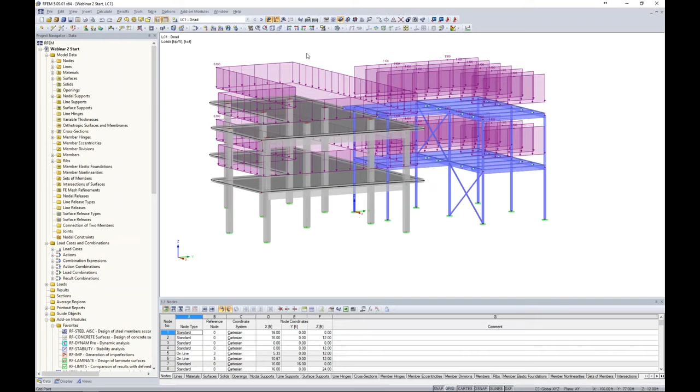Previously we loaded the structure, and we ran our load combinations and got a full analysis. Now that isn't always the case. Sometimes we go to run an analysis after we have loaded our structure. For example, we have loaded our structure with dead load here. Now previously everything ran great, but as we know with any finite element software that we're using, that doesn't always happen. So when we go to run this first load case here, as we know from RFEM Webinar 1, this is running according to a linear analysis, we immediately get an instability.

Instabilities are nothing new despite what program you're using, but I want to show you these features that make our lives a little bit easier within RFEM. The first thing to know is the text about the specific instability. It says this model is unstable. The instability is found at FE node number 64, direction Z. So it immediately gives me a location and tells me that there's some type of issue in the global vertical direction.

The model is statically underdetermined. So when I close out of this error message, you'll see that my big red arrows show me exactly where FE node number 64 occurs. Now, I'm not going to say that 100% of the time this big red arrow is going to point out our issue.

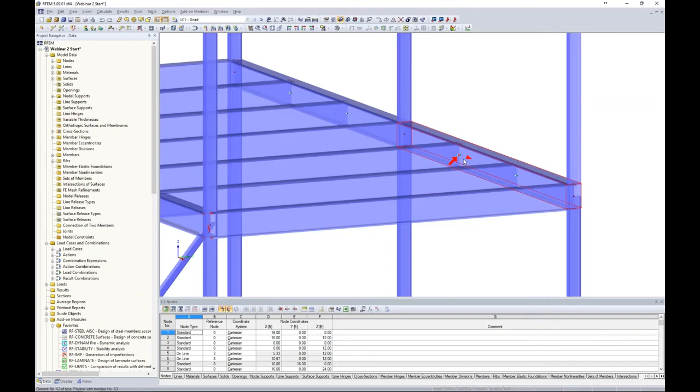But a lot of the times this really is where the issue is occurring. So when I scroll in here, I really don't see anything immediately. When I turn it to a wireframe model, okay, well, I can zoom in here and see that I forgot to connect my node here of my beam to my transverse beam. Well, that's no problem at all. I can just easily drag and drop that to connect those two members.

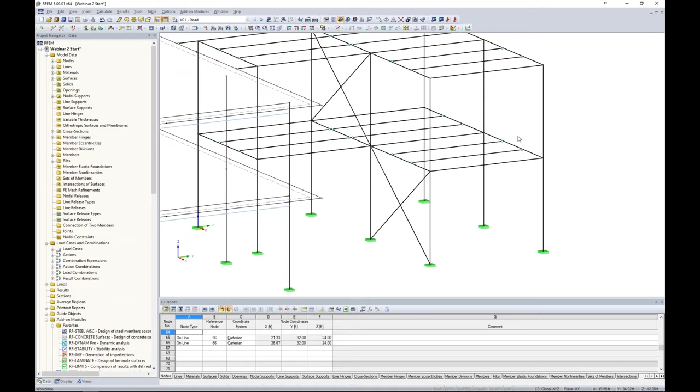So you can imagine that when we have a huge model with a lot of members and we get this error message for an instability, that red arrow is a huge benefit to really narrow down on where that issue is occurring, rather than it being like hunting for a needle in a haystack, trying to determine maybe if a node isn't connected someplace.

So now we can go and run our load combination again, or this is our particular load case. We run it. Everything appears to run okay this time. We immediately get our deflections here, which we can decrease the deformation factor. So that's great, but now we need to run our first load combination, 1.4 dead load.

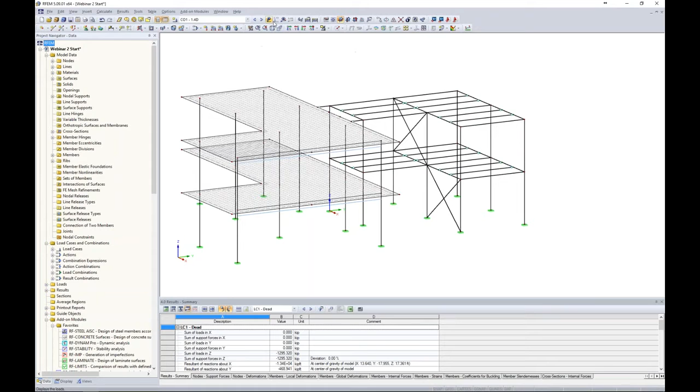So this is just a load combination from the ASCE 7. I take a look at my applied loads. It's applying that 1.4 factor to all of my dead loads, our surface loads and line loads here. And maybe turning this back into the rendered view, I begin my first load combination analysis.

And lo and behold, we get another error message. So it's another instability, but this time our text is a little bit different. It says our model is unstable and the instability is found at this location, direction X. So we have a little bit of a different direction that it's being affected now.

But this says a specified load is greater than the critical load. So this tells me that at this particular location I probably have some type of issue with buckling, because the specified load is greater than the critical load.

Well, I can close out of this error message and zoom into this big red arrow here. Maybe I turn this into wireframe. I see that everything is connecting fine. So I don't really understand where this error message could be coming from.

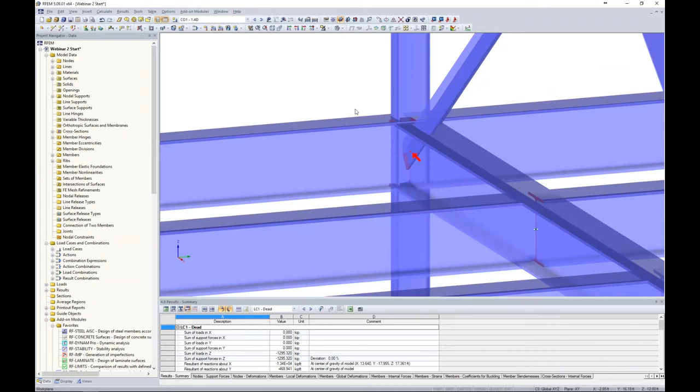Well, this is where we can utilize our add-on module RF Stability. So from our long list of add-on modules over here on the left in our project navigator, we can launch RF Stability. As you can see, this is just a simple dialog box that pops up within the program, and it allows us to do an eigenvalue analysis for a few different eigenvalues based on the buckling behavior of our structure. And what we can do is import different axial forces from either load cases or combinations.

Now, because I was able to solve for my first load case, dead load, just fine, it makes sense to import in those axial loads to see how the structure is behaving based on those applied axial forces. Now, we have quite a few other settings here that I won't get into in too much detail, but we do have an option down here that I can calculate an eigenvector for an unstable model. So this is if I couldn't get the model to solve at all, so that the causes of the instability can be checked graphically. So this is a feature too if we couldn't even get our dead load to solve.

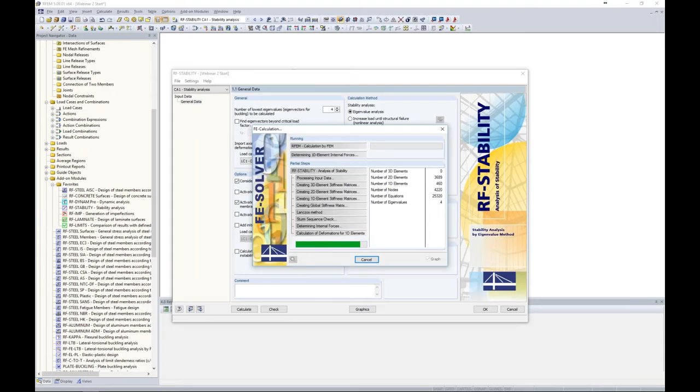Now for this, I will run the calculation and it quickly runs the different 4 eigenvalues. And I'll now see my results available in my tables here. So you'll see I'll have 2 different columns. The first is the critical load factor.

Now the critical load factor is just a factor that I can multiply that applied dead load by before I'm going to see the associated buckling behavior. We have 4 different eigenvalues, so the critical load factors are listed here in ascending order. So probably our most important one would be this first eigenvalue. Now the magnification factor is just a relationship between the moments of a linear static analysis and a second order analysis. So essentially my first order moment times my magnification factor is going to give me my second order moment. But now we're a little bit more concerned with this critical load factor.

So if I take a look at my graphics, we're still in this add-on module RF Stability. We can see with our drop-down box here I have four different eigenvectors. Looking at the first eigenvector, we can see the buckling behavior of this structure.

Remember, I can only multiply my dead loads by 1.03 before seeing this type of behavior. If I take a look at the other eigenvectors, same type of behavior. It all has to do with these slender columns here. So when I multiply my dead load by 1.03, I see this buckling behavior, and when I try to run 1.4 times my dead load, that's where our instability is coming from. These members simply can't handle the applied loads.

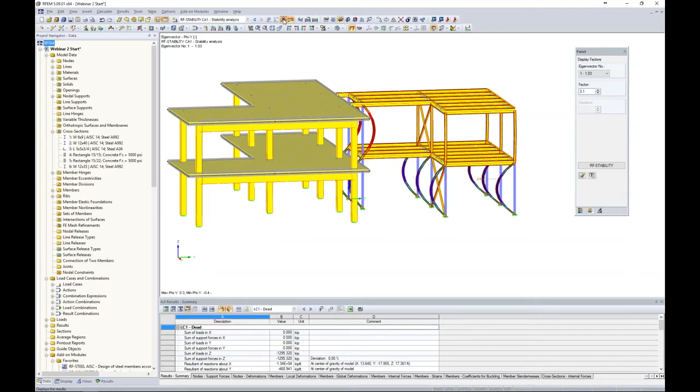So back under my Data tab, at the very top is all of my input data. I can take a look at my cross sections, for example, and maybe turn off my results from RF Stability. I click on my first cross section defined - it's a W6x9, a very small number. So perhaps I want to increase that to something a little bit larger.

I can just right click and edit all of these cross sections at once because they're assigned to a single cross section within the program. Open up my cross-section database, here are all of my AISC shapes. We would like to choose something more like a W10x49, much bigger than a 6x9. Still an A992 steel is okay, but we're going to have a bigger cross-section here. So I click OK, and it's asking me to clear my results.

So now when we go to run our 1.4 dead load, run the analysis, everything should run fine because now we have a sturdier member there and we don't see that same buckling behavior. So you can see how RF Stability is extremely useful, not just if you have an instability, but if you want to see the different buckling modes of your structure. I did a few other webinars where I utilized RF Stability to export as imperfections as well.

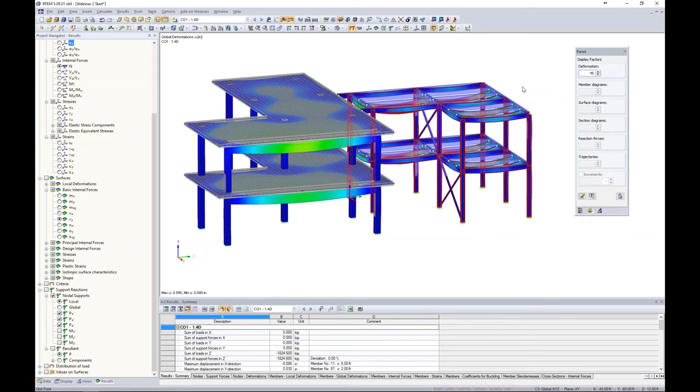Okay, so now that we've addressed instabilities, I'd like to move on to singularities. The first thing to do is turn off our results, and let's take a look at our top surface here of our concrete structure.

If I drag my selection toolbar over that top surface, I can use my drop-down box to create a visibility by selected objects. You can always right-click and show the hidden objects in the background if you'd like, or right-click and turn that off so we get a clean view of only the structure we've selected.

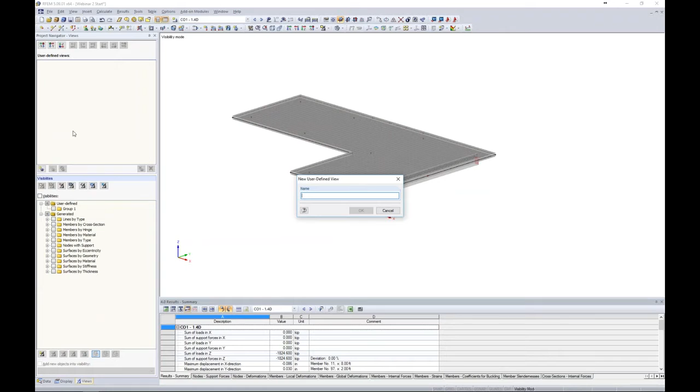Under Views, I can create a new visibility, and we'll call this Top Slab. I click OK, so now I have this user-defined view under Views that I can always refer to despite whatever view I'm currently in. This is the case when we go to show the hidden objects in the background and show a wireframe view - members are always 1D elements in a finite element software, while our surfaces are 2D elements.

But the problem is that where we intersect this column to the 2D surface, you can see the intersection occurs at this teeny tiny FE mesh element, the single node point. So we can imagine all of our force transfer is occurring at this single point. Inevitably we're going to get very high stresses, very high forces. If we go to do design of this concrete slab, we're going to get high reinforcement simply because it's a product of the high internal forces at this location.

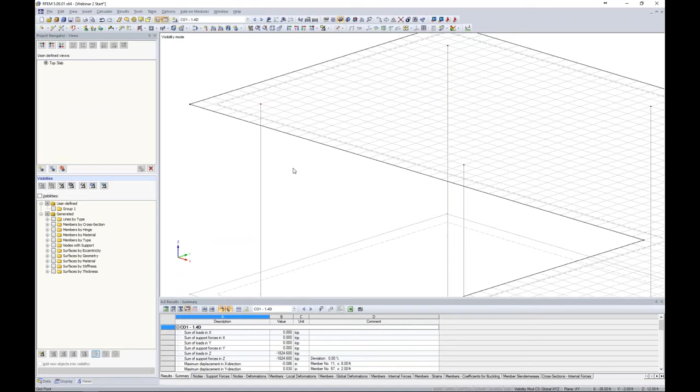Now in reality, when we render this, these columns are 15 inches by 15 inches, so we are going to get some load distribution. And like I said, this is not just for our program RFEM - this is common in any finite element software. So what tools do we have available in RFEM to help us address this so we're not overly designing our structure?

The first thing I'm going to do is jump to a different model here that I have saved, where I've gone ahead and used our add-on module RF Concrete Surfaces to do my reinforcement design. Now I have an entire hour-long webinar dedicated to just surface design using this add-on module, so we won't get into it today. But if you're interested in how we can do reinforcement design for this, refer to that YouTube video.

So once we run our analysis in RF-CONCRETE Surfaces to get design per the ACI, we have our different required reinforcement. The first is AS1 in the top direction. Now, judging by this red arrow, we can see the reinforcement direction, and you'll notice that where these columns are framing into the slab, we have high reinforcement given there. The same goes for AS2 in the other direction.

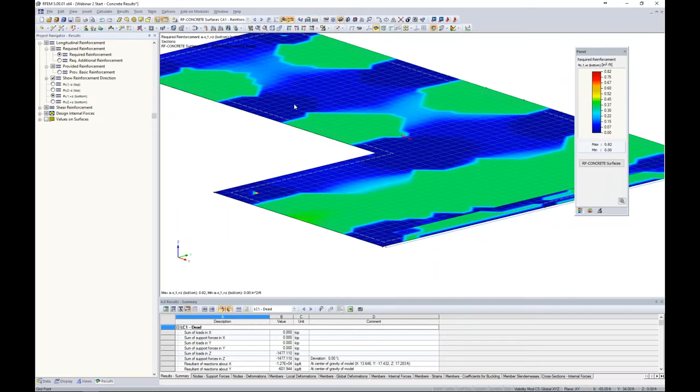Now, when we're looking at AS1 at the bottom, it's not the same, which makes sense. We have a lot of bending at the bottom of our slab between our columns, so that's where most of our bottom reinforcement is going to be. Same with AS2 at the bottom in the other direction.

Now, focusing on AS1 top and for our slab with this particular reinforcement design, this is nice in terms of our contours, but perhaps we'd like to see this in a more numerical value. Well, we can do so with sections, and what we will do with our first section is up here in our dropdown, we can create a new section numerically.

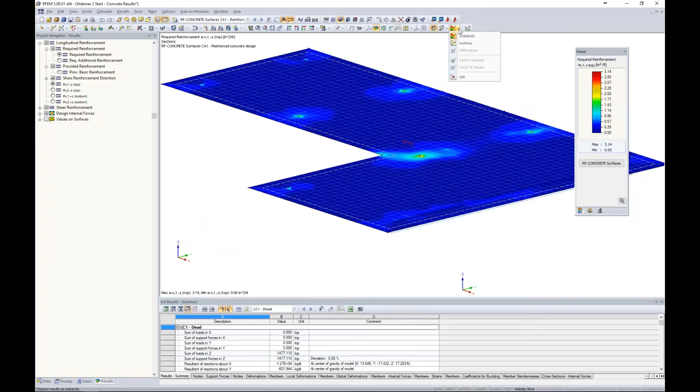But before I do that, right next to it, we have the option to completely turn off our ISO lines. So these results will still be available, but I'm just simply turning off those ISO lines for the sake of making my section cut right down through the center of my slab. So a section is exactly what you would think of it. It's going to give me the internal forces or my results at that particular location. So we can create this section numerically.

Now, the first thing I need to do is to give it a section name, section 1. It will be a section cut through my surface, and I can apply this to my single surface number 2 here by clicking on that graphically. The next thing to define is my start and end points for the section.

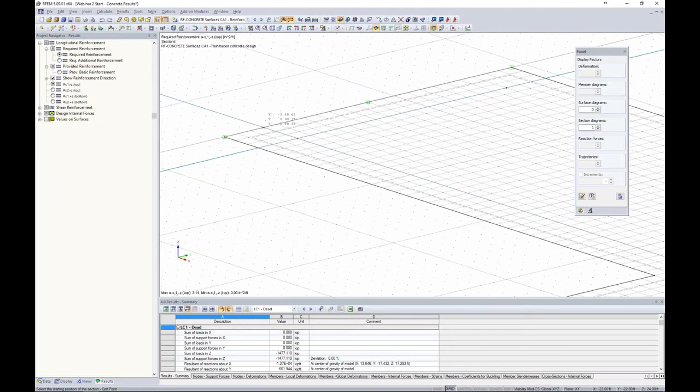So what I like to do is maybe turn on my drawing grid down here, and I can activate that down at the bottom, change my origin for my drawing grid, and I can choose my 2 points here by zooming in, and I want it right down that column line. So my second point will just be located at the second end of my slab, and because of those AutoCAD-like features, the program does a great job of just snapping to those points that I most likely would want to place my section.

Now, the section on surface, the projection direction, we can have it in the global X, Y, or Z orientation, or we can define our own vector if we want it at some type of angle.

Once I click OK, then it immediately brings me into the results diagram for my section, and you'll see our exact same results that we were viewing in RFEM, and in particular, we take a look at our reinforcement design per RF-CONCRETE Surfaces. Here are those spikes in reinforcement where our columns are framing into our surface. I think we can easily say that this is being over-designed for those internal forces.

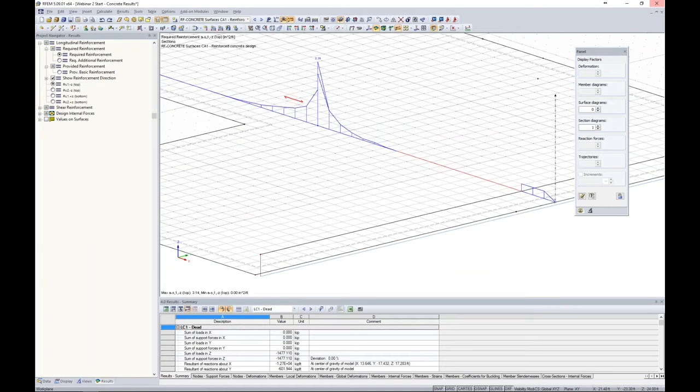Now, I can always exit out of here and view these surfaces, as you can see graphically on my surface as well. So going back to the results diagram by right-clicking, I want to show you guys a useful feature called smoothing ranges. So up at the top is the option to edit our smoothing ranges.

Now, my first column occurs 3 feet from the edge of the slab. My second column occurs at 20 feet from the edge of the slab, and my third at 41 feet. So what I'd like to do is smooth out the range 1 foot on either side of the column for a 2-foot range there. So this is to account for the load distribution that's occurring when in reality the program's not accounting for that.

So what we can do is define our different ranges. So for example, for our first column, the beginning will be 2 feet and the end will be 4 feet. The program automatically calculates the length as a total of 2 feet for that first smoothing range. The second will be from 19 feet to 21 feet. And lastly, for our third column, it will be from 40 to 42 feet.

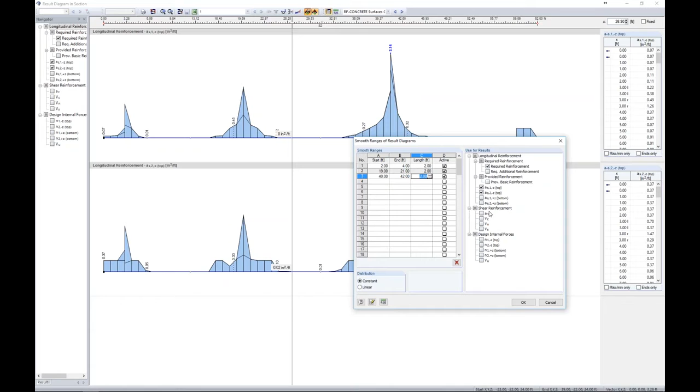The program automatically assumes that we'd like to apply these smoothing ranges to what we're currently looking at, but we can always activate and deactivate different results available here. So now when I click OK, you can see the smoothing range applied.

For example, column number 3, we went from 3.14 inches squared per foot to 1.65 inches squared per foot. So extremely useful in the sense that we can print this to our printout report. We can even use this drop-down box here and pull up one of our other load combinations.

And for example, I'm going to clear out all of these result diagrams and just activate my MX and MY. Again, we're seeing those spikes in internal forces here. I can go back to my smoothing ranges and simply activate the checkbox for MX and MY for all 3 of these ranges. So now when I click OK, you're going to see the smoothing range applied here as well.

Now, one thing to note, if we jump back to RF concrete surfaces, for example, the smoothing ranges are shown here, but if I were to exit out, they are not shown graphically here within the model. So the question is, well, that's great, but how can we apply this so that the program actually designs for those average forces rather than us just kind of putting a fictitious number after our results are shown in the smoothing ranges?

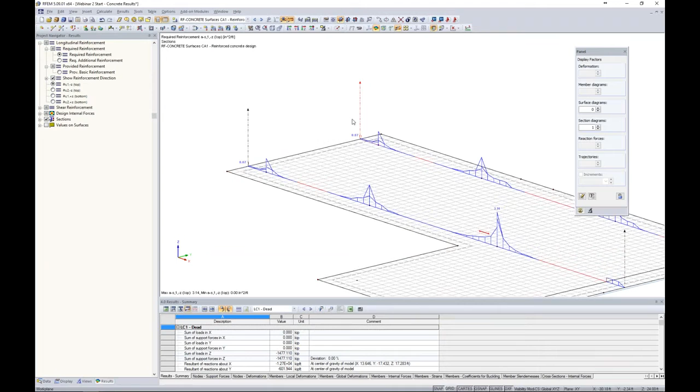And one thing I forgot to mention here, if we take this section cut and we highlight it, we hold down our control key, maybe we want to copy it down this other column line just to give us some perspective on some high design forces as well at this location. So smoothing ranges are great, but if we go back to our data tab, we will see these sections available here. We have section 1 that we just created, and then here's our second copied section.

There's another feature called average regions. So if I right click, I can create a new average region. Now for this, we want to apply it to a particular surface. So I graphically select surface number 2 here.

And you'll notice that I have 3 different forms that I can select for my average region: a rectangle, a circle, or an ellipse. So for our particular case, our columns are rectangular in shape. So it's probably most beneficial to use a rectangular averaging region. But maybe you have a circular column framing into this slab. So that can be utilized as well.

The next thing we want to do is to define where we want to apply the center of the averaging region. Well, we'll apply it to our first column here. The dimensions, if we want to average it out over a 2-foot section again, for both our A and B dimensions shown in this picture, we can.

Now, you have a lot of control on what internal forces you exactly want to average. So the program assumes that for the local axes of our average region, U and V, we want to correlate those with the X and Y local axes of our surface. But in reality, we can activate all 4 of these if we just want to average out everything together, independent of what our local axes are doing.

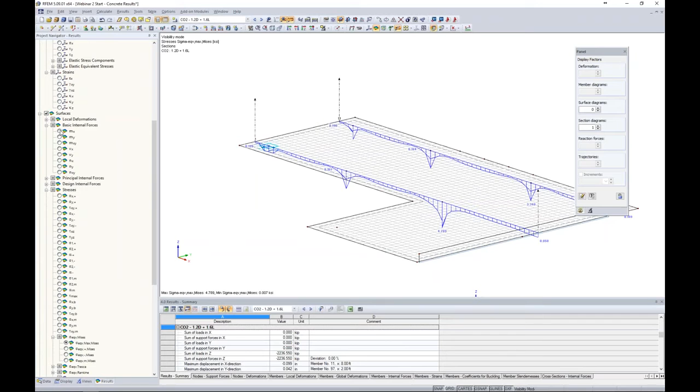Now, to make this very clear what we're doing, I'm going to jump to one of these particular load combinations, and under my results, I'm going to activate my sections. So we're still viewing our sections here, but for my MX forces. So this isn't my concrete design now, this is my internal forces MX.

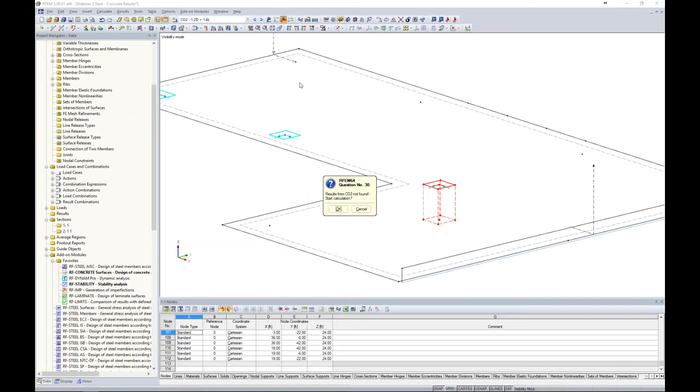Now with this average region, all I have to do is to select it, hold down my control key, and then I can take it, drag it, and drop it. It's asking me to clear my results, that's fine, and drag and drop it to some other regions here. Now I can rerun that same load combination rather quickly here, and we will see that average region now apply. Now previously this was something like 83 kips per foot, so you can understand that this is now going to give us less internal forces.

Now if we jump back to RF-Concrete Surfaces, and it looks like we lost our results here, so I'm just going to quickly rerun that. And all this is doing is I went ahead and applied the ultimate limit state designs for all of my load combinations to do my reinforcement design. But what I want to show you with these average regions is that my As,1,top is still showing 3.16 inches squared per foot. So this average region did absolutely nothing to help us with that.

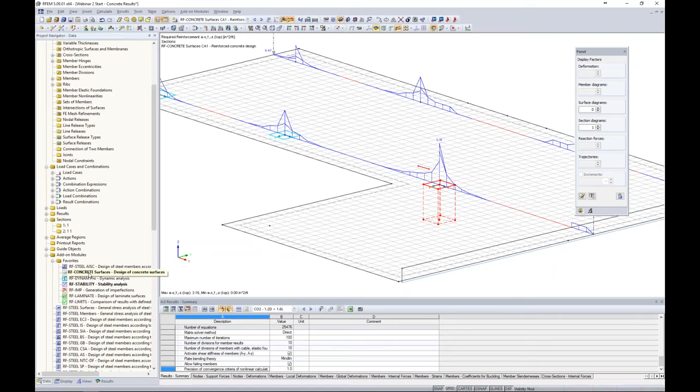So why is that? Well, back under the Data tab, under the Concrete Surfaces add-on module. So again, if you want a more detailed look into this particular add-on module, refer to our previously recorded webinar. But to let you know, when you are using average regions for concrete design, under the Details tab, it is default to have this option checked off. But what we'd like to do is to apply the average internal forces for our ultimate and serviceability limit state designs. So now we want to check this checkbox. I click OK, I click OK.

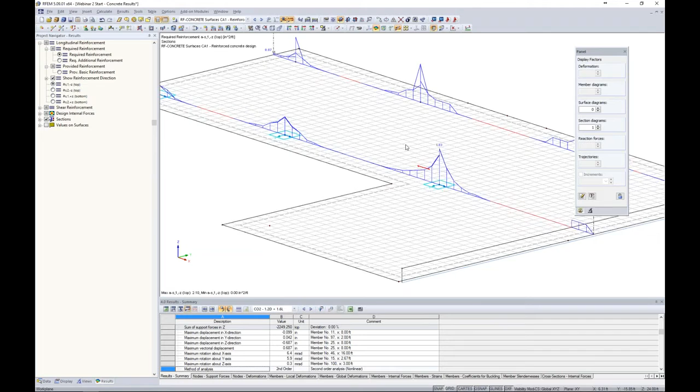We've lost our results again, but we can easily run a quick analysis, which you can see solves rather quickly, because now it's taking those average internal forces to give us our reinforcement design. So now we have gone from 3.14 to 1.83. So this is how we can apply those average regions to address singularities within the program, especially for something like concrete design. Okay, so that is what I wanted to look at in terms of singularities.

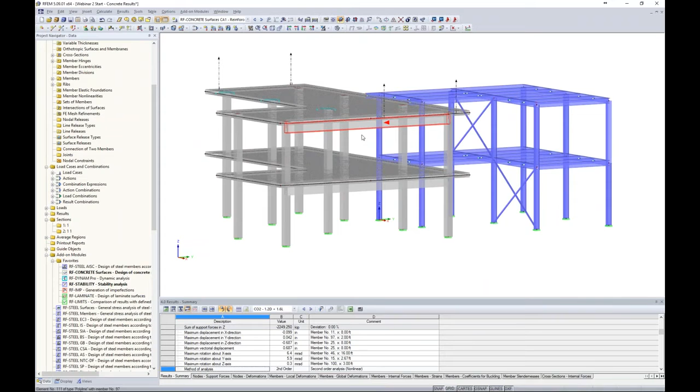Now, switching topics, I'm going to cancel my visibility mode here, render my model. And in RFEM Webinar 1, if you can remember, if you were present, we created this beam member here, and it's actually a rib because we wanted to span from this column to this column, but we didn't have an intermediate column, so we thought it'd be best to apply a rib member there. Now, if I were to double click on this rib member, you can see that the member type is actually set to that. And previously we had defined effective widths for this rib member to take that into account for analysis, but also designed for our reinforcement per the ACI.

Now, let's say we have a situation that we actually have a precast element, and the precast slab is sitting on this precast beam, and it's not a monolithic pour like what we'd see with a rib type member, but in reality, I want to fully release the moment. Maybe I still have resistance for my lateral movement and of course my vertical movement, so X, Y, and Z is fixed, but no moment will be transferred between the two. So what I'd like to do is to not have this set as a rib, but we'll set this to a beam member. Now when I click OK, it's asking me to clear my results.

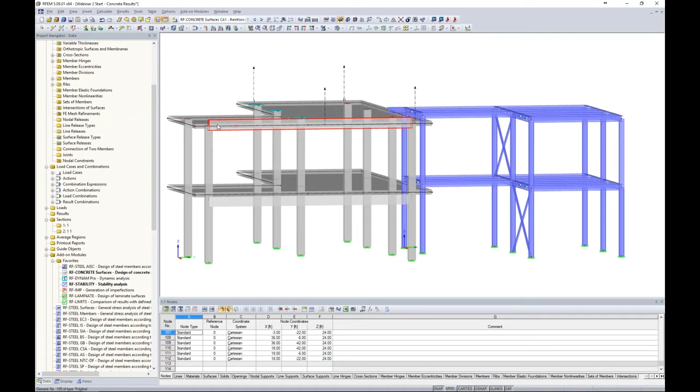I take a look. Well, my typical member is modeled directly at the same center line as the slab. But in reality, what I'd like to do is to still drop this beam down below the surface. So how can I apply an eccentricity? Well, if I double click this member, we have a tab here called Options, and that's where you'll see member eccentricity. Now we need to define a new member eccentricity. And you'll see here that we have not only the local axis system X, Y, and Z for a member, we can also set it according to the global X, Y, and Z. The local might come in handy because if we are modeling a member at an angle, then obviously we want to apply the eccentricity according to the local axes rather than the global.

Now we also can apply this movement of the beam in the X, Y, and Z, so not necessarily just vertical eccentricities, but left and right too. So typically with this situation, I would need to understand, well, what's half the depth of my slab, what's half the depth of my beam, add those together, and I can manually apply my eccentricity. But we have automatic features in the program that can do all of that for us. So you can see here that I have 6 different options of where I can select my beam to be, for the eccentricity to be applied to. This little red dot highlights exactly which option I've selected here.

So I'd like the top of my beam, and I want to offset it according to a surface. So then I can graphically select my surface number 2 here, and I want to offset it from the bottom of that slab. So now when I click OK through all these dialog boxes, we can see that that beam was dropped down below the bottom of the slab. Now this is the same concept as the rib member, but now we're not taking into account that effective width.

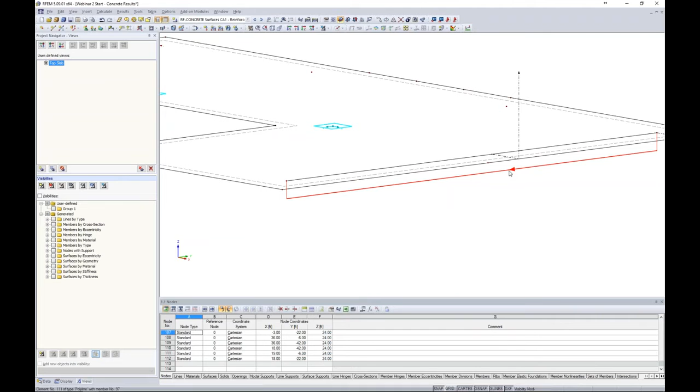So the question is that these little rigid links have full fixity to transfer moment, shear, and axial forces, but remember, we're trying to alleviate these moment forces being transferred from the slab to the beam, causing high torsion within the beam. So how can we automatically do this without modeling individually these little rigid links, what we may have to typically do?

Well, in the program, we have a feature under data, and if I scroll up to my input data up here, you'll see a line release. So what I can do is I can right-click to apply a new line release. The first thing the program asks me to do is to define the line, and I will apply the line that I used to create the member. If I try and click the member itself, it doesn't allow me to do that because that's in reality not where the member was modeled, but it was applied to this line integrated within the surface. Then we create a line release type.

So with a line release, we have the ability to apply releases in the translation directions X, Y, and Z. You can see that we also have partial fixities here, so maybe we don't have a full release or a full connection here, but we can apply that partial fixity spring constant, and we can get into things like nonlinearities. Nonlinearities might be very important for something like friction. If we choose one of the friction options in here, then we have some different settings based on friction coefficients that will allow us to emulate that same connection type.

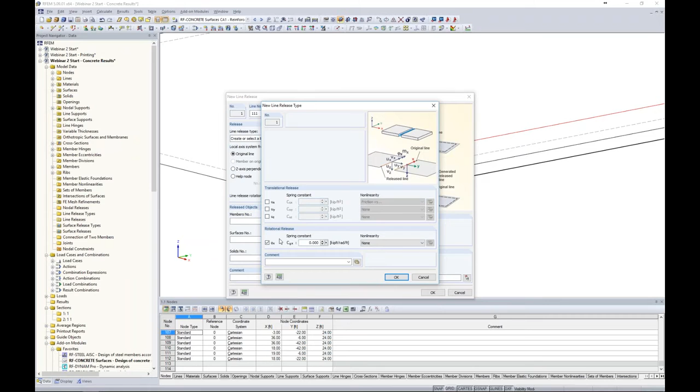Now, keep in mind that these are the local axes of the original line. So surfaces have their own local axes, our beam has its own local axes, and so do our lines. So we're not releasing any of the translation or rotation directions of the beams or surface, but rather the line itself. So we are going to completely release this rotational release, phi x here, and we can click OK.

We do need to define which is the released object. Well, we will apply this to our surface number 2 again, and we simply press OK, and we'll see the setting within the program that shows us that we have some type of line release here, judging by this blue symbol.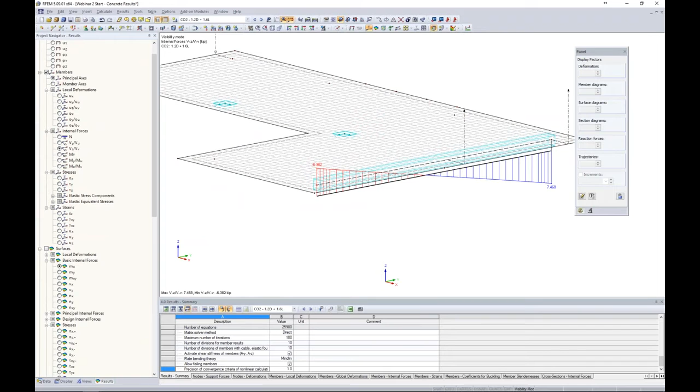So now if I were to run one of my applied load combinations, such as 1.2 dead, 1.6 live, we can run this load combination, and again, we're just viewing our initial view here, and I'm going to turn off my surfaces. And we just want to take a look at our member design. I'm going to turn off my sections. And rather, we're taking a look at our members and our internal forces for torsion. So you can see here that we still have a small amount of torsion along the member length of 1.933 kips per foot. But what would this look like had we not released that particular moment along the member length?

So this is how we can effectively apply line releases in the program if, for example, we did not want to connect our surface to our beam element. Okay, so changing topics once again, I want to move on to result beams. For this, I am going to cancel out my visibility mode here. Let's render our model. And moving on to result beams.

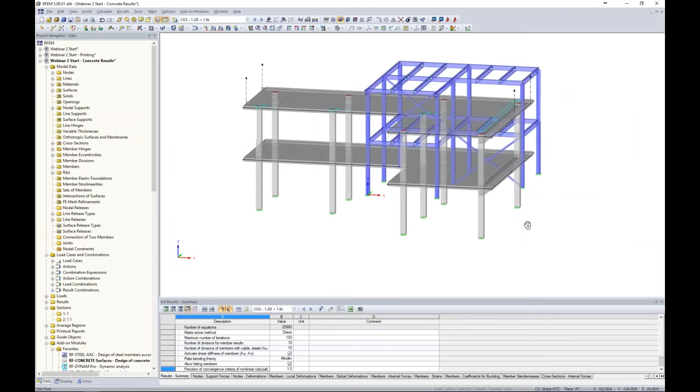So let's say that I'm interested in only my concrete structure here. I'm not so interested in my steel structure, and in particular, I want to know what the story shear forces are. And again, I don't want to incorporate the steel beams, but just the concrete surfaces and members. So how do I easily pull that information from the program? And this is where something like a result beam will come in handy.

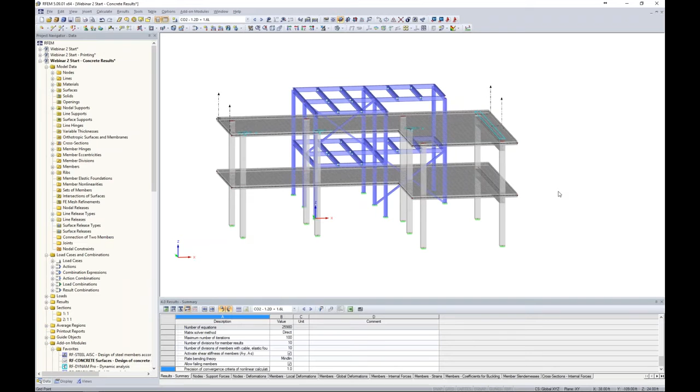So what I'm going to do is I'm first going to create a new user-defined view here, and using my drop-down box, visibility by selected objects. Now keep in mind that behind the scenes, when I show my hidden objects in the background, this steel section is still here. So under my views, I can create this new user-defined view. We'll call this one concrete structure only. I click OK.

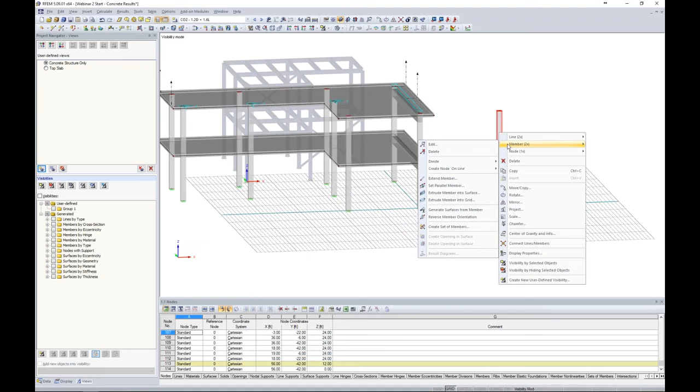And I'm going to turn back on my grid. I'm going to redefine the origin at the base of my structure. I'm going to hold down my control key to select these two members, and once again holding down my control key, I'm going to copy these, drag and drop them to a location parallel to the concrete structure. So what I'd like to do from here is to select these two members, right-click to edit them. And under the member type is where we can choose result beam.

Now, a result beam is simply going to take the information from other objects in the model and apply it so that we can view the analysis results as a member internal force. Now, result beams don't add to the stiffness of our structure. We're not applying them to an analysis. It's just simply a different way to view our results. So as far as a cross section, it doesn't matter if it's concrete, steel, aluminum, your own user-defined section, you can choose anything here. You'll also notice I don't even need to put a support at the base of this column section. What I need to do here is to define some additional information.

Now, as far as result beams, we have 4 different options. The first is within a cuboid quadratic. So this is going to use a quadratic integration area where the centroid of all of the elements that I'm trying to incorporate within this result beam needs to be located within the member's axis. And by member's axis, I mean the axes of our actual result beam shown here. So I'm not going to use this option today, but we will be using this second option as our second example today. So this is within a cuboid general. What this will do is it will apply a rectangular integration area where the centroid can vary according to the local axes of our member.

The third option we have is within a cylinder, so this will use a circular integration area where the centroid must be located at the member's axis. And again, this is clarified here with this nice picture that we have. The last option here is to choose from listed including objects. So here is where I'm going to start off with my first example of a result beam.

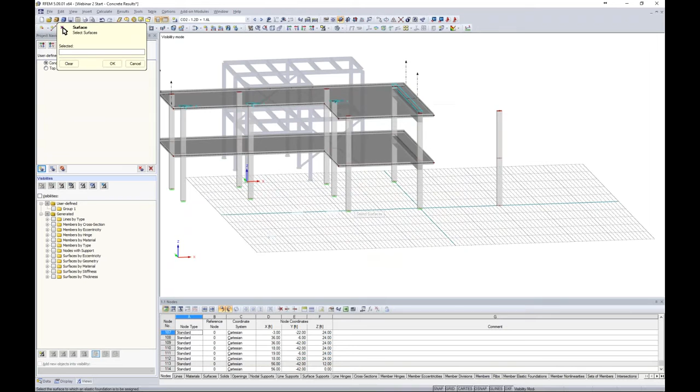And what I want to do is I want to select my surfaces that I'd like to apply to this result beam, so I can just highlight everything. Remember, my steel is in the background, but because it's not selected, I don't have to worry about selecting anything from there. As far as solids, we don't have any, so we can leave this either as all or none. And members, we want to graphically select all of our concrete members here. I click OK. We can even exclude any objects from our selection if we'd like to here. I click OK, I click OK.

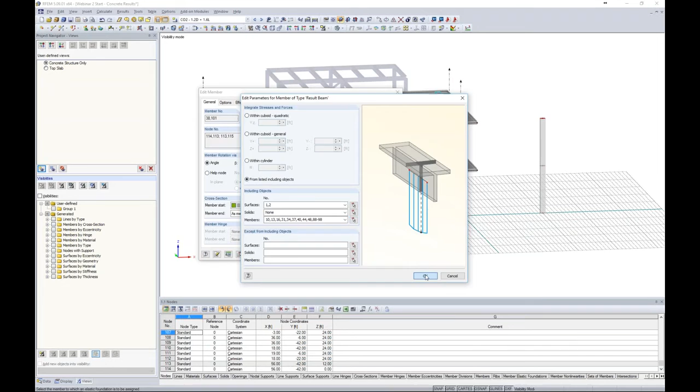Now I'm going to run one of our load combinations where I have a lateral load applied. So you can remember from webinar 1, we applied a wind load in the Y direction here with some gravity loads. So if I run this first load combination, then you will notice that after the result is complete, I have my member over here with some results as well. So what's exactly happening? Well, I want to view my results on my members like I would any other member within the model.

What this is doing is incorporating all of my objects here and applying it to my result beam. Just to summarize what's exactly going on.

As far as viewing my shear forces in the Y direction, this is the local Y direction, so I can always right click and turn on the local axes of my members to understand exactly which direction I'm looking at. The local Y gives us my story shear information. For example, the top story is going to be 10.46 kips for this particular load combination. My first story shear is 39 minus the 10, and finally I have my base shear given here at 48 kips.

If we take a look at our shear in the other direction, we hardly have any forces at all. That's just because we haven't applied any lateral loads to this.

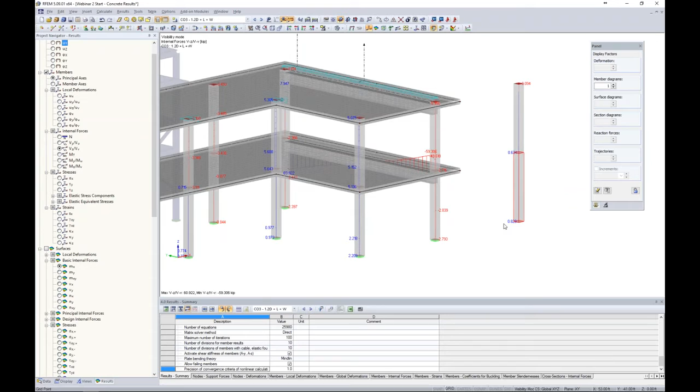Now lastly, we can even take a look at our axial load. So why would our axial loads be important? Well, if we're interested in the sum of our forces, I can see that for my concrete structure only, my sum of forces in the Z direction is 1,455 kips. Now this is different from my table down here shown in my results summary, which also gives you the sum of the loads in the Z direction, but this is for the entire structure, including the steel structure over here. So again, a result beam would be beneficial for only part of your structure here.

Now, the moments are not applicable in this case, and that is because we have moved the members of this result beam away from the centroid of the objects that we're interested in. So just keep that in mind when we're looking at something like moments, we can't get an accurate representation here. I'll show you in just a minute how we can do so.

But first, I want to quickly jump back to the PowerPoint here to explain what's going on. So as you saw with a result beam, we're integrating the results from a list of objects.

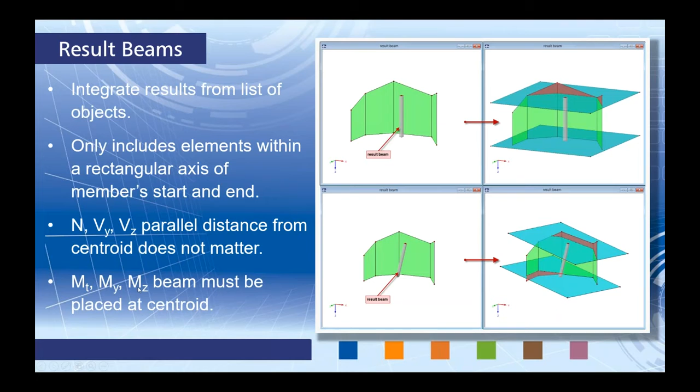Going back to the PowerPoint, now our moments, which I just mentioned, torsion, strong and weak axis bending, the beam must be placed at the centroid.

So let's move on to a quick second example with our result beams of how we can utilize this to view our moments. For example, if I'm interested in my top slab here, which we can go back to our user-defined views, and I really want to design a 4-foot wide section here on my slab, and I want to pull those internal forces from that 4-foot wide section.

Well, a section cut isn't going to work here because a section cut only gives me my internal forces at that exact location, exactly what it is, it's a cut. So in order to utilize a 4-foot section and pull those internal forces, we want to use a result beam. So what we can do is create a new beam member here, and instead of the member type beam, we will choose result beam.

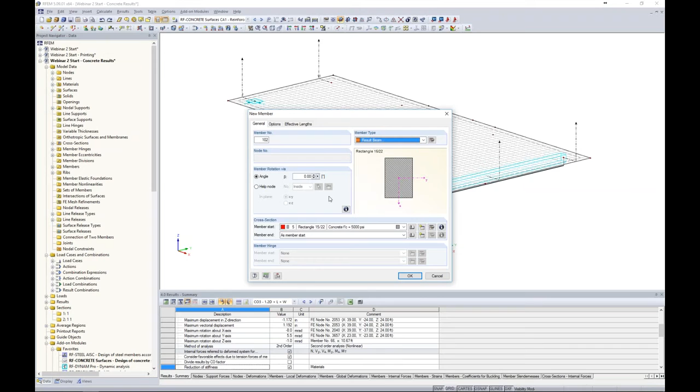And again, the cross section does not matter. We could choose anything that we like because we're not contributing to the stiffness of the structure in any way.

We want to move on to the details of this result beam, and this time I want to choose a cuboid. So if I'm interested in a 4-foot section, that means I want to choose 2 feet on either side of my result beam, laid out clearly in this picture. As far as the vertical direction, this isn't as important because I don't have any members modeled above or below, I'm only interested in this slab, so 1 foot is more than enough. But if I had any elements within this 2-foot vertical section, they would also be included in my results, so keep that in mind. This list is no longer relevant because I'm using only this section up here.

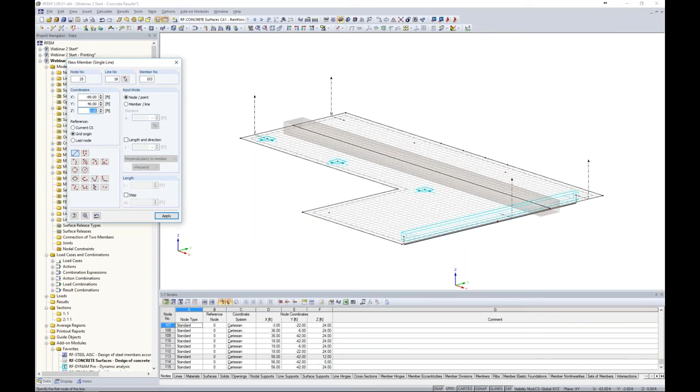So when I click OK, I can begin modeling my new member. I will snap to the midpoint of this line over here to make my result beam section right down the middle of this slab. You can see the program automatically snaps to the perpendicular section, just like in AutoCAD. And here is my result beam, so we can see that 4-foot wide section.

We can even render this for a clearer view of what's going on. So now let's take a look at our results, and I will run one of my load cases here - it doesn't matter, 1.2 dead, 1.6 live. I'm going to run the analysis.

And for our result beams, we can view them as we would any other member, as I mentioned before. So the first thing we want to do is take a look at our member internal forces, and perhaps we're interested in the moment. Let me turn this to wireframe view. Now our moments don't have a nice smooth diagram for my beam member here.

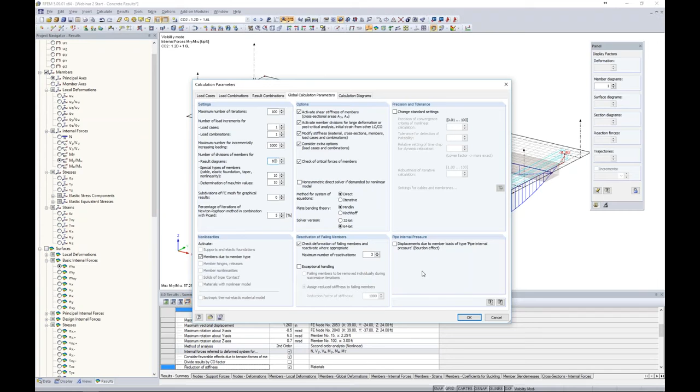So what's going on with this results diagram? It's pretty choppy. Well, when you're using a result beam like this, under Calculate, Calculation Parameters, we want to change the number of divisions of our members for result diagrams. The default is set to 10, let's actually change this to something like 100. I click OK, my results will inevitably be cleared. I quickly run this analysis again, and we'll see that our results look much better.

So that can impact the way that you're viewing your results. You want to make sure to increase those numbers of sections if you see any type of discontinuities like we saw with the beam before.

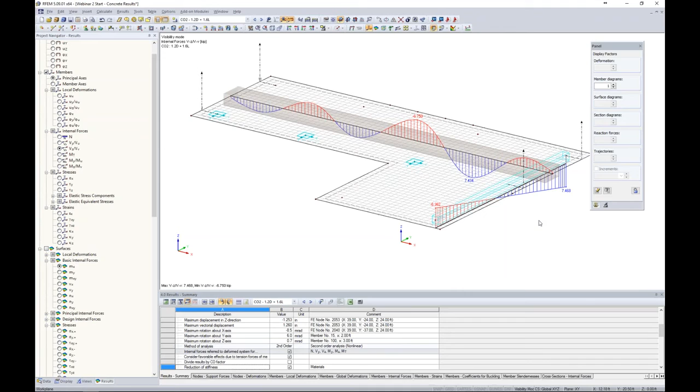So now we can see that our moment diagram is displayed quite nicely for our strong axis. Remember, these are the internal forces for our 4-foot wide section, that we can take and use for our own design. We can take a look at the weak axis bending here, and even axial and shear forces - these are all relevant within this particular section. But this is what I'm saying when you want to take a look at the internal forces of our moments, the centroid of our elements that we're interested in must be at the same location as our result beam's axes. So just something to keep in mind there.

Okay, so now that we have seen a little bit more about result beams and focused heavily on our concrete structure, let us cancel this visibility mode to take a look at our entire structure. And I'm going to render it.

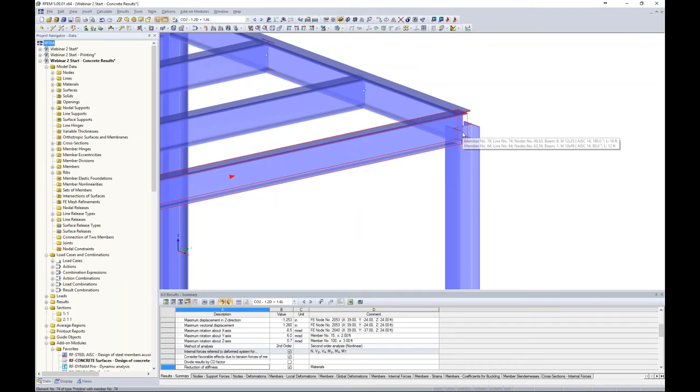Maybe I'm interested in the steel structure, and in particular I zoom in here to take a look at this connection. Now, this connection is pretty straightforward, we have members framing in at 90 degrees. But if we didn't, let's say we had tapered members, or members framing in at a weird angle, well this might flag us to think, okay, perhaps we'd like to do a finite element stress analysis for this connection.

But if I turn this into a wireframe view, I cannot do a stress analysis of this connection because all of my members are 1D elements. So we can get stresses along the member length and the member as a whole, but not for this connection. So what would we like to do about it? Well, the first thing to note is that this member, judging by this big red arrow shown here, the member end is framing into this node.

The same with this member, but this third member, the member start is framing at that node. So what I can do is right-click to reverse the member orientation. Now all three of my members will be framing in at this single node.

I'm going to select them all, right-click, and choose to divide the member by a certain distance. Because I switched around the member orientation, the member ends are all located at this particular node, so 3 feet from the member end is where I'm going to divide it. I've done nothing more than just create smaller members out of my initial member length.

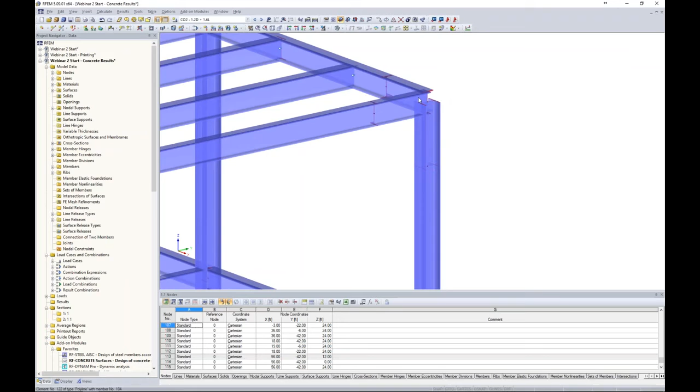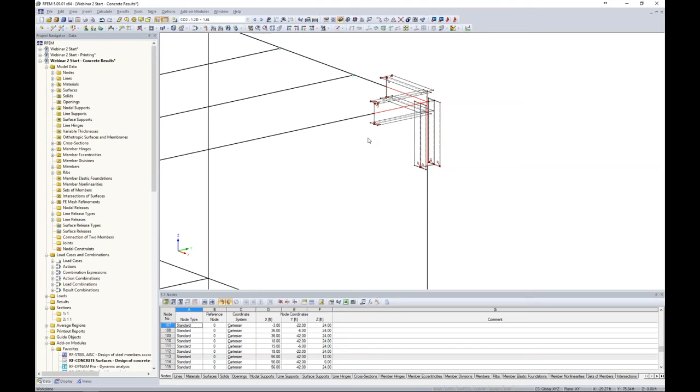If I render this, sure, we get this rendered view of our W section, but turning it back into wireframe view, I'll highlight all three of these members, right-click, and under member choose the option to generate surfaces from members. So now we've taken these 1D member elements and turned them into 2D surface elements, which will allow us to do a stress analysis on this particular connection.

Now, the first thing I want to do is under my display, turn off my FE mesh refinements. I'll get into this later.

I wanted to mention that this W shape was previously a W12 by 35. This new W shape generated by the surfaces has all those exact properties. For example, the web surface here has a thickness of 0.31, taken from the W shape. All of my dimensions, materials, and thicknesses were taken from that member modeled previously, so I don't have to make any changes in regards to that.

What I do need to do is clean up the geometry a little bit before running my analysis. So I can highlight all of my members and create a new visibility by selected objects. Maybe I want to show my hidden objects in the background.

This is a nice little trick, even for users of RFEM who've been using the program for a while. If you didn't know, you can select one of these elements, and if you hold down Alt on the keyboard, that will allow you to rotate about those selected elements. Just a nice little feature to utilize there.

Now, to clean up the geometry, I'm going to start by deleting these center lines. They're no longer needed. You'll see that the column is a little bit low here, so I'd like to extend this up a little bit above my beams.

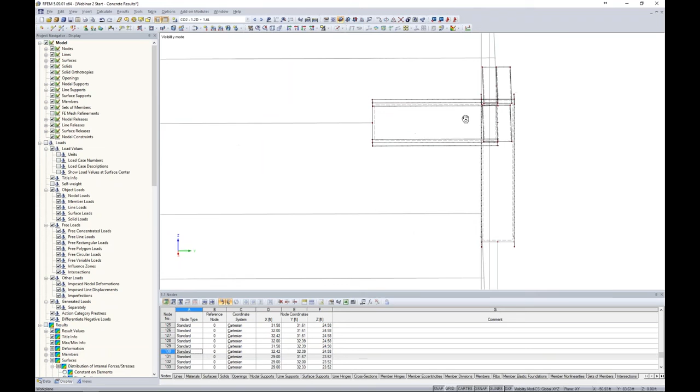Now the next thing is to move this beam on our left to the face of the column. That's pretty easy. If we rotate our model and zoom in, I can again select these 3 nodes that comprise the top of this beam and just drag and drop them to the snap point of the face of that column. Those AutoCAD-like features allow us to snap to the most important parts of the model. I do the same thing for the bottom, simply snapping to that point, and now that beam is framing in quite nicely to that column.

If I take a look at my rendered view, we can see that here. Notice the rendered view of our 1D elements transitions quite nicely to those 2D surface elements. But with that said, if I look at my wireframe view, these 1D member elements are framing into this 2D surface element again at a single FE mesh point.

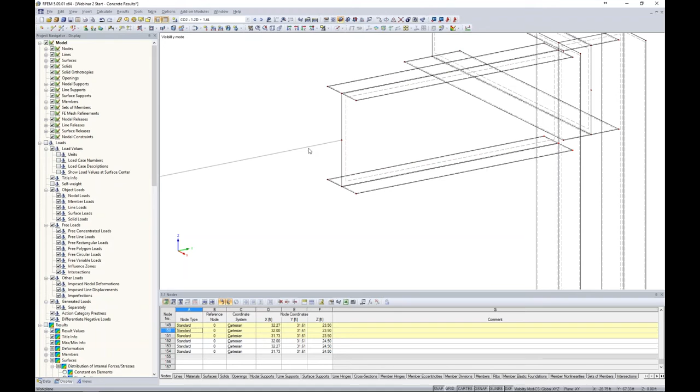This is a singularity. Now, by no means do we want to use an average region here, because in reality what's happening is this whole load from this 1D member element should be distributed to the entire face of this beam. So how do we distribute that load? Well, that's where we can apply just our little rigid plate here at the end of our member.

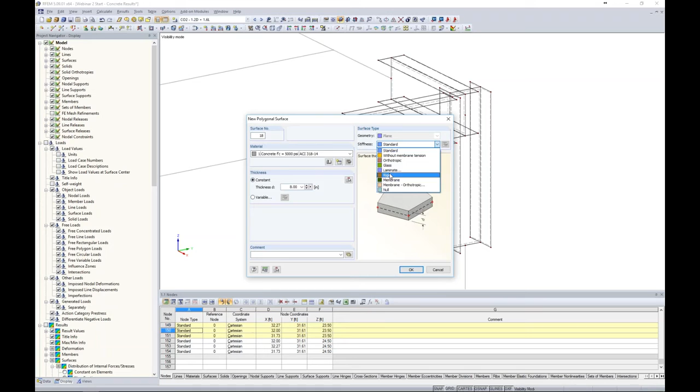Now, under our surfaces in our drop-down box at the top here, we can choose something such as a polygon. Now, as far as the stiffness goes, I want to set this to rigid. So pretty high stiffness here, not infinite, but very, very high within the program. I click OK. So then I can draw in this little rigid beam at the end of my member, and now that load will be distributed as such.

Now the same goes for my other beam locations. If I don't take care to draw in this little rigid plate, then I'm going to get singularity issues at all these other locations here. So I'm just snapping to the 4 points of my column. And if I render this, I can see that these plates are shown with the pink color here. That shows me it's a different material.

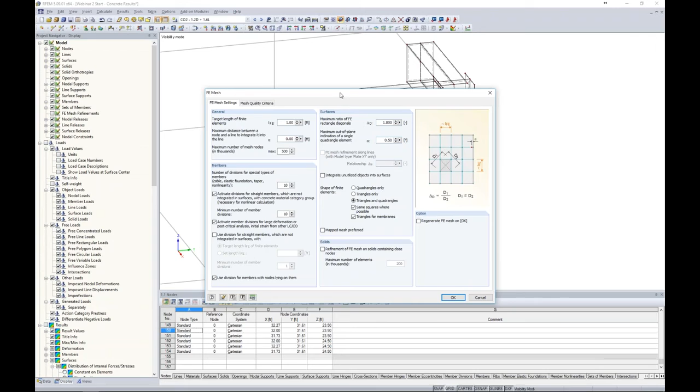Now, a couple other things to take care of before we're ready to run our analysis. Going back to wireframe view, and I take a look under Calculate, FE Mesh settings, we will see here that the global FE Mesh settings are set at 1 foot. Sure, 1 foot is great for our huge slab element of our concrete structure, but when we're looking at something as small as this connection, 1 foot is not ideal.

So rather than changing this global setting, when I made that transition to these 2D surface elements, the program actually put in these FE Mesh refinements for me. So that's denoted by this little symbol here. If I double click on it, I can see that the FE Mesh was defined for each individual surface here with a target FE length of 1 inch.

Now this is more beneficial because if I were to apply 1 inch to my global settings, I'm applying a 1 inch FE Mesh to all my slab surfaces, and my solve time is going to be much, much higher. So the more FE Mesh elements you have, the longer it's going to take to solve. So it's in your best interest to utilize these FE Mesh refinements for situations such as these where it requires a smaller mesh here but not anywhere else within the model.

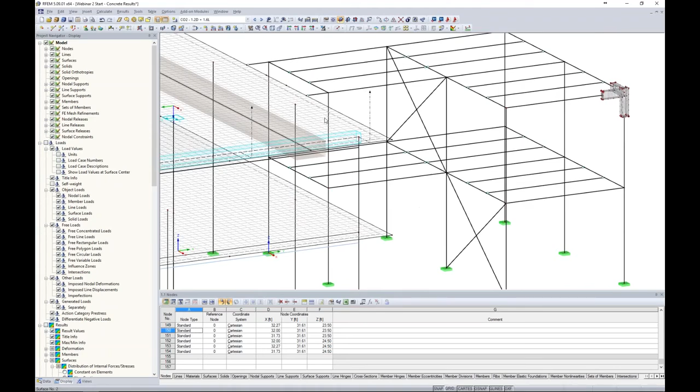So now when I go to Calculate, Generate FE Mesh, and let me cancel out of my visibility mode here, we can see the FE Mesh is automatically generated. Everything ties together quite nicely. I don't have to manually submesh anything here. But when I look at my concrete surface over here, I can see that the FE Mesh is still 1 foot. So that looks great.

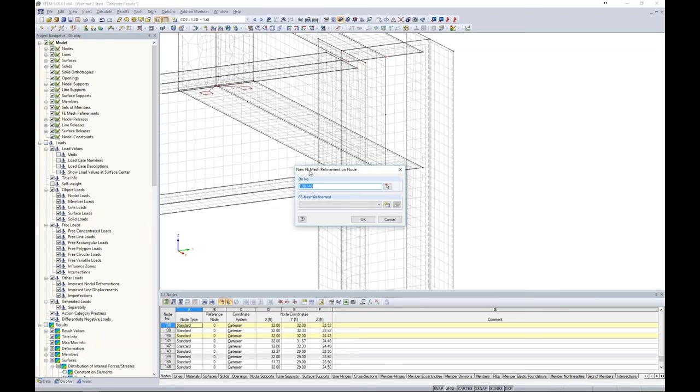Now, keep in mind, we can always apply our own FE Mesh refinements. For example, maybe I have some critical points here where my beam is framing into my web, and I can hold down my control key to select 2 nodes. I can right-click to add an FE Mesh refinement. So for this one, I create a new definition type, and we can see here that the node is automatically selected because the program knows that this is what we selected back in RFEM.

We can give it a radius of 0.5 feet or 6 inches. Maybe our target length for the inner portion of the circle is 0.02, and the outer will transition back to that 1 inch of 0.08. I click OK. Now the program puts these symbols at those locations for my FE Mesh Refinement. I can go to Calculate, Generate FE Mesh, and now we can see that the program has created this smaller mesh at this particular location, and it transitions nicely back into our surface mesh.

Under the Display tab, we can always turn off these FE Mesh Refinement symbols. The FE Mesh Refinement is still there, but we just don't need to necessarily see those big symbols.

So in regards to our connection type here, originally I modeled this structure so that it has a fully rigid connection of this beam here framing into this column's web. But maybe I go back and I decide, well, actually, I'm going to have some type of weld here, and this weld is not going to have a full moment transfer. So I want to relieve some of those moments within the beam framing into the column web here.

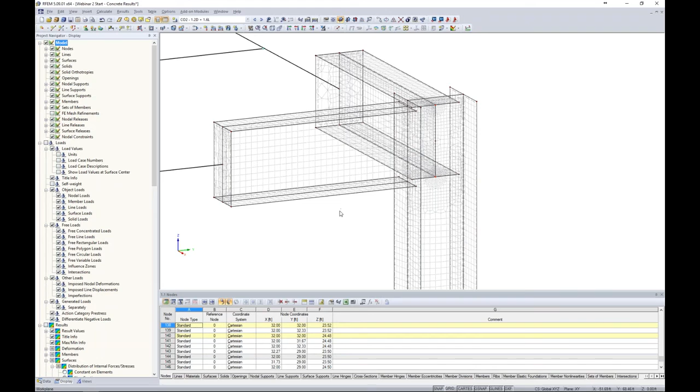So how do I apply that to this connection? Well, that's where we can utilize line releases again. So like I said, we're going to come back and apply line releases on a much smaller level here. So back under the Data tab, under Line Releases, we want to choose the option to assign a new line release graphically. So here, I don't want to override my previous line release type because this is my beam to slab connection that we talked about earlier.

So what I'm going to do is I'm just going to simply create a new line release type number 2. I want to release this moment, but maybe, like I mentioned, we have some type of partial fixity here with the weld type that we're using. So it might be something more like 40 kips per foot for partial fixity. So I can click OK.

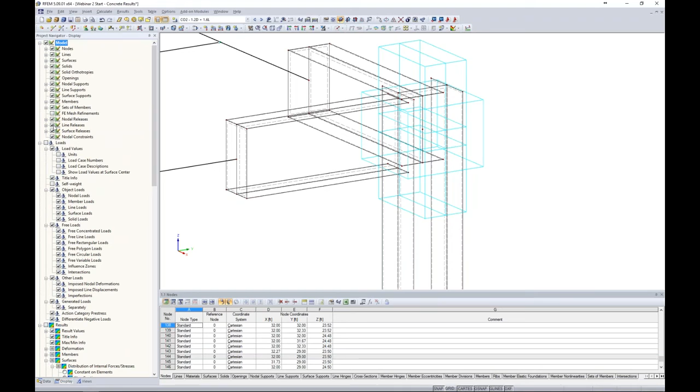The surfaces that I'd like to release these lines from, I select my web element. I click OK. So now when I exit out of this dialog box, I can graphically select these lines of where this beam is framing into this web. So now you can see my symbols showing my line release here, and of course under the display we can also turn those off as well if we don't like to see them.

So we're almost ready to run our analysis, but let's take one final look at our applied loads, and we will jump to our dead load here, see our applied loads. Now these are member loads applied in kips per foot along our various steel members here, but we no longer have members, so we lost those applied loads. Well, in a similar sense, we can apply the same load magnitude, but this time as a new line load. So line loads are applicable for something like a surface, for example, where we don't have a member available.

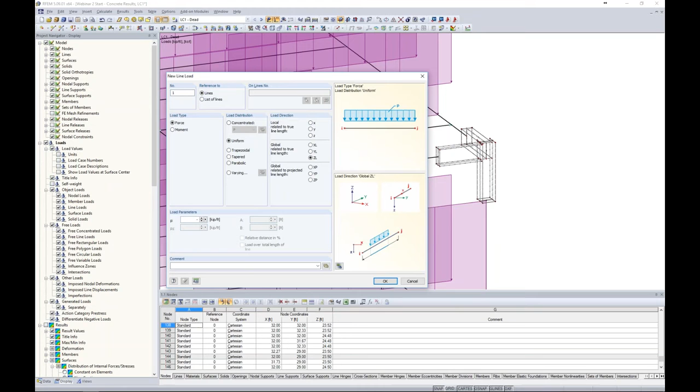We apply it in the global Z direction with a magnitude of -1.1 kips per foot. I can scroll in here, apply that to the top of this beam, and you can see it transitions quite nicely from our beam to our surface element. Now the same thing can be done for our live load. We'll apply a new line load here, but this time we want to give it a new load magnitude of 0.3 kips per foot. I click OK, and then I can apply that to the top of this beam.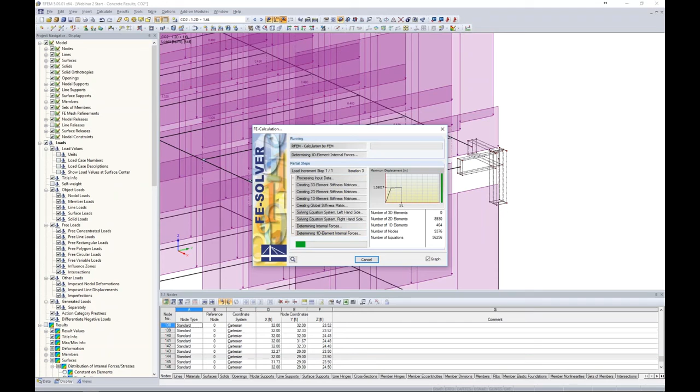So now we can run our first load combination. So here I'll just apply the 1.2 dead plus 1.6 live. We can run our analysis. Now keep in mind this will take just a split second longer because we've now introduced these new finite elements for this connection into the program. As you can see, it still solves rather quick.

We can turn off our loads, and I'm going to actually choose a user-defined section here. Visibility by selected objects. Now under my results, I'm probably most interested not in my members, but this time I'm interested in my surfaces. And under surfaces, we have our von Mises stresses. So now when I'm taking a look at this particular connection and my von Mises stresses, maybe I select my point here to rotate about that, I have some pretty high stresses here at these critical points. As you can see, 165 KSI.

Now you'll notice that the program is smoothing all of these internal forces together, and that's just so that we can have a nice pretty picture of what's going on with our connection. But in reality, this isn't a correct way to view our results. So this is so important with any finite element software that we pay careful attention to how we're viewing these results, such as stresses on our surface elements. Now again, with my AISC Advanced Steel Design webinar, I did an entire hour dedicated to a connection just like this, and I go into much more detail, but obviously we're almost out of time today.

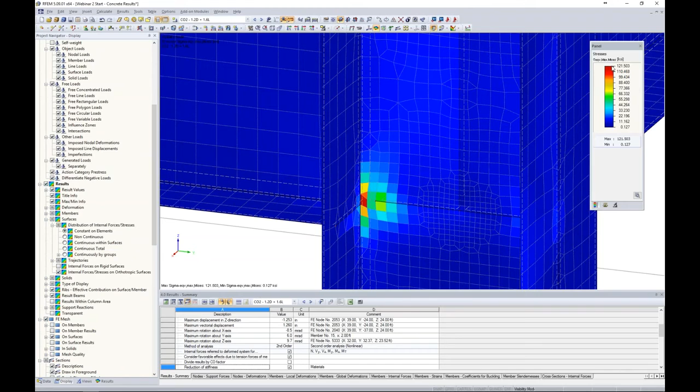So the only thing I want to show you is that rather than tying it together with this smoothing algorithm, we'd rather view our results here under our display tab in our project navigator. Under surfaces, the distribution of internal forces and stresses, we'll view this as constant on elements. So now each particular FE element has its own contour, and we're not trying to tie those together, and our stresses went down from 160 to 121. They're still high, but you can see what a difference that makes.

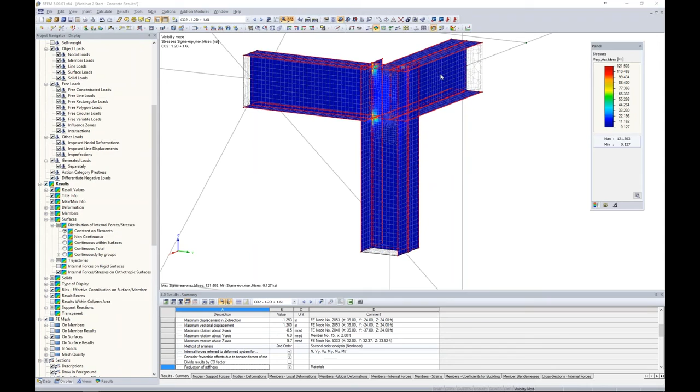So now that we still have extremely high stresses, I think we're all in agreement that this is much beyond the yield strength that this connection type can handle. So maybe real quickly, we'd like to utilize the nonlinear capabilities within the program, such as a plastic design. So what I can do is I can select all of my surfaces here, and I can right-click to edit them. And currently, I'm just using the Steel A992 defined within the program. That's what all my steel members are designed for right now. But I'm going to create a new material.

And again, I'm just going to go to my material database, and we covered all of this in webinar 1. And I'm going to activate my favorites group to select Steel A992 here. So I still want all those same properties, but my material model I'm going to choose is isotropic plastic 2D/3D. So this allows us to do a plastic analysis within the program.

Now we can get into some very complicated details here, such as things like tearing, yielding. We can change our strain hardening modulus, but for this example, you can see that our yield strength is more or less set to 50 KSI, and our strain hardening modulus is given as such. I click OK through these dialog boxes, so now I've just simply changed those surface elements to utilize the isotropic plastic 2D, but all the rest of my steel elements are still utilizing an isotropic linear elastic material model.

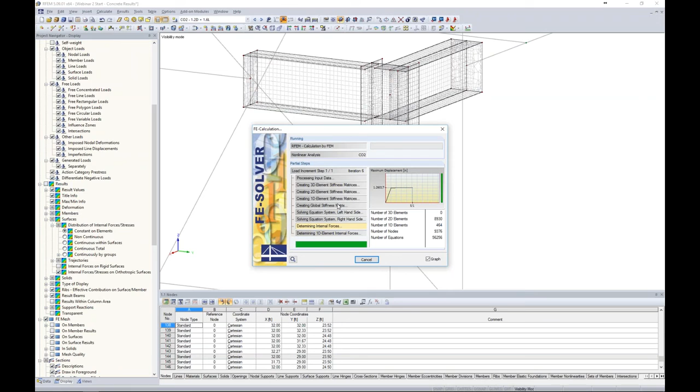So now when I go to run this exact same load combination, what the program is going to do is apply these loads to each element within this finite element connection, and the minute that it reaches the yield strength of 50 KSI, that load is distributed to the adjacent FE mesh elements. It will continue to do so until the load has been fully distributed. So in reality, we shouldn't see a single FE mesh element here higher than 50 KSI.

And taking a look at our stresses, that's exactly what's occurring. The highest stress here is 50 KSI before that load is distributed to an adjacent element. We can also now view under our results tab, because we're running a plastic analysis, an option for criteria here. Criteria shows us our nonlinearity rate of our single element, so you can see exactly which elements are in the fully plastic state or have completely yielded.

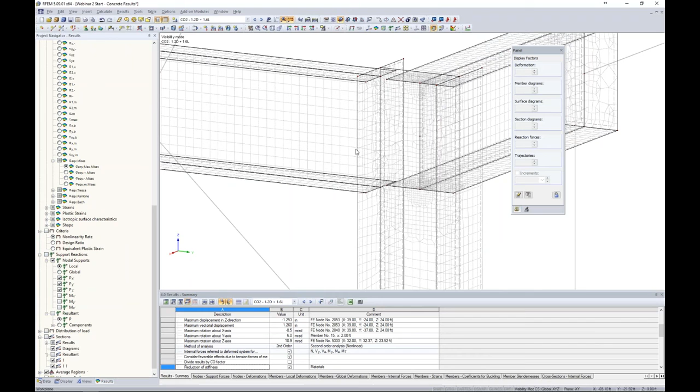So just a little interesting topic, and like I said, my advanced steel design really goes into much more detail on this if you are interested in something like this connection.

So one more quick topic to cover before ending this webinar is just a couple printout report options. The first, which maybe some people didn't know existed who have been using RFEM, is a 3D PDF. So for example, let's say I'm interested in quickly printing off this connection detail to a 3D PDF. Well, I can either go to File, Print Graphic, but we also have a quick tool here under our toolbar called Print Graphic. And we can print directly to a printer, we can print to our printout report, but we also have the option to print to a 3D PDF.

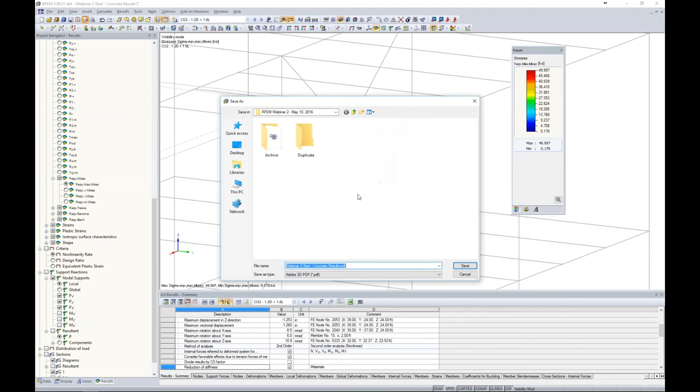So when I click OK, it just asks me to simply save it. I can save it wherever I'd like. And then it will automatically launch this 3D PDF based on my structure here. So when we take a look at this 3D PDF, here's our entire structure, and what's great about this is that now we can make changes on our view within the actual PDF Adobe program here.

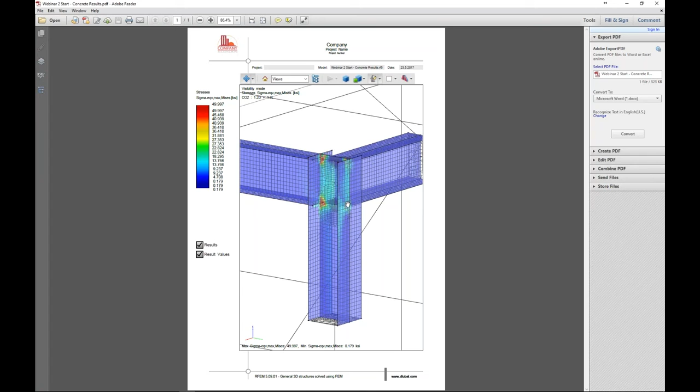We can spin it, for example, to take a look at our connection here. We can use the pan tool to zoom in and to really focus on this connection in particular. So again, you can see how this can be beneficial for any type of graphic views for a 3D printout. And then we can email, we can add this to a printout report, we can do whatever we'd like with it.

Now, the other quick topic to discuss is if we are interested in our results and quickly printing off many load combinations at once. So for this, I'm going to jump to an already saved model, just back to our concrete example here of our slab. So let's say, for instance, that I'm currently taking a look at my MX forces here of my structure, and I want to take a look at all of the different load combinations, and I'd like to print this off directly to my printout report.

So typically I'd have to take a picture of my load combination 7 here, add it to my printout report, change my load combination, take my picture of load combination 8, add it to the printout report. So what features do we have that make our lives a little bit easier? Well, under the print graphic report again, we have this option here called mass print. So I am going to print to our printout report, and I'm going to use the full page width, but maybe I want to use 50% of the height to get a couple pictures on each page.

Well, under mass print, this is where all of our model data, our loading data, and our results data is available. This is basically exactly what we're seeing in our results project navigator. Now, the program's assuming that we'd like to print off what we're currently viewing. So you can see it's showing me MX for my surfaces. And instead of the current load case and combination, I want to print off all load cases and combinations. I click OK, I click OK.

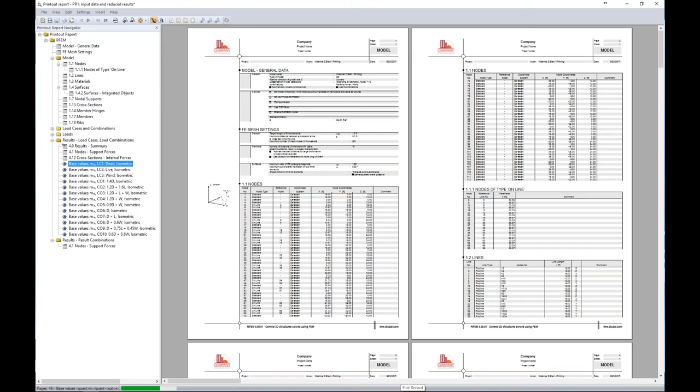So now the program asks me to generate my printout report. Well, I can maybe select one of the saved templates I have. I click OK. So now the program is cycling through all of the different load combinations for my particular MX internal forces of my slab, and it's going to automatically add them to my printout report. So now you can see that we jump directly to where those pictures are added.

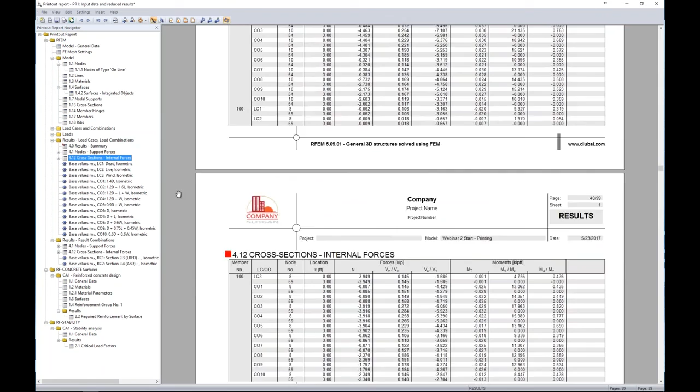And I can zoom in here to show you guys exactly what's going on. So here's my load case 1 dead load and my applicable MX forces. Load case 2, we can get into our load combination 1, load combination 2, and so forth. So you can see how this can be extremely valuable if we're trying to quickly print off a lot of different load cases or results at once. We can automatically do that.

Now keep in mind, you can always right click to edit one of these pictures. If, for example, I don't want to see the FE mesh settings, well, I can go under my display, scroll down to my FE mesh, turn that off, I click back, and now you'll see that that picture that I currently edited is automatically updated to not show the FE mesh.

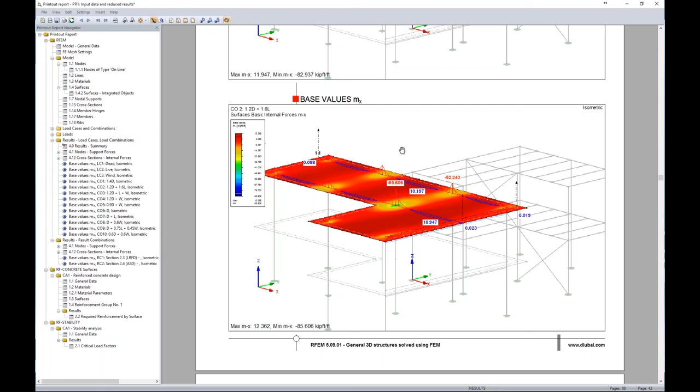Now, another very powerful feature: if I make any changes to this model, including maybe different loads, different cross sections, all of these pictures will update automatically. So I never have to worry about reprinting all of these pictures. I think our printout report is one of the stronger features of our program, especially in comparison to maybe what you're currently using. You can always add your company logo, your company header. You'll see all of the add-on modules are added to the printout report as well.

And if we wanted to switch the order of these, for example, remember running RF-STABILITY at the beginning of the webinar. If we maybe wanted to have RF-STABILITY in our printout report before our design of our RF-CONCRETE Surfaces, all I have to do is select it and drag and drop it, and the program will automatically update the printout report to put RF-STABILITY before RF-CONCRETE Surfaces. So again, just a very powerful feature in terms of our printout report.

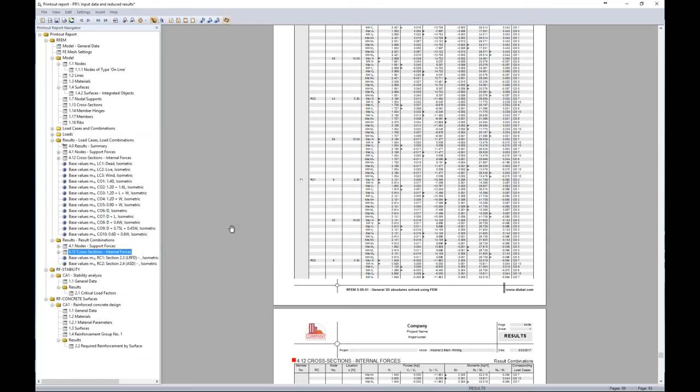So with that said, we can jump back to the PowerPoint to conclude our webinar today. I know that I flew through this information, so if you are interested in any additional add-on modules or RFEM itself, we certainly have much more available on our website at dlubal.com. This webinar today will be recorded and put on our YouTube channel, so you can always reference it, because again, I know I went rather quickly, but perhaps you saw some things today that you'd like to revisit. You also heard me say that we have a lot of previously recorded webinars also available on that YouTube channel.